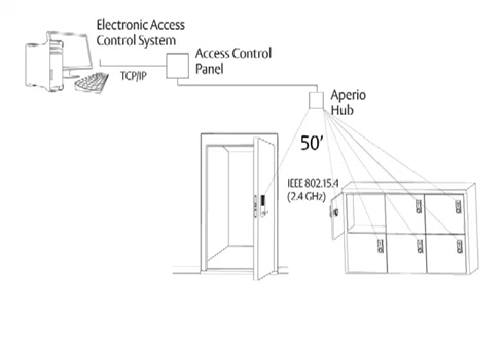For a stable and reliable radio link, make sure the cabinet, locker, or drawer on which you are installing the K100 is within 50 feet of an Aperio hub. For details on installing an Aperio hub, please refer to the Aperio hub installation instructions, which are available on our website, intelligentopenings.com.

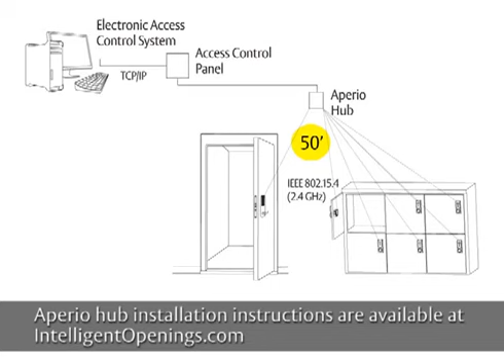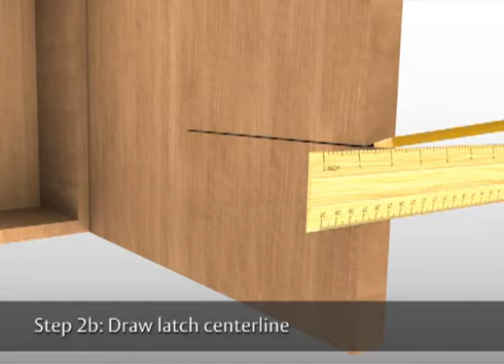Hold the lock body to the inside of the door and position it generally where you would like it to mount. Locate the lock centerline notch on the latch and use a pencil to mark this point on the inside of the cabinet door. Draw the horizontal latch centerline from this mark on the inside of the cabinet door. Next, transfer this centerline to the inside of the cabinet.

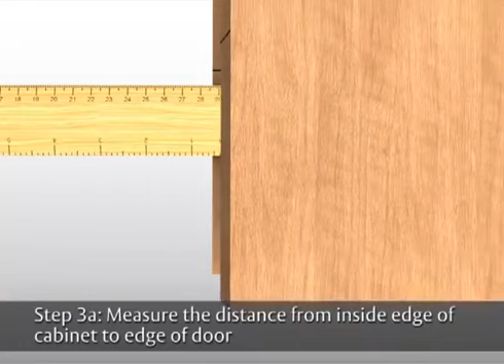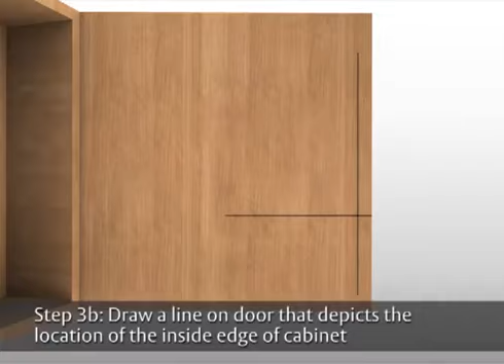Measure the horizontal distance between the inside edge of the cabinet and the door edge. Using the same distance away from the door edge, draw a line on the inside surface of the door. This line depicts the location of the strike mounting surface. Peel off the protective layer of the lock template and align both the latch center line and the line depicting the inside wall of the cabinet.

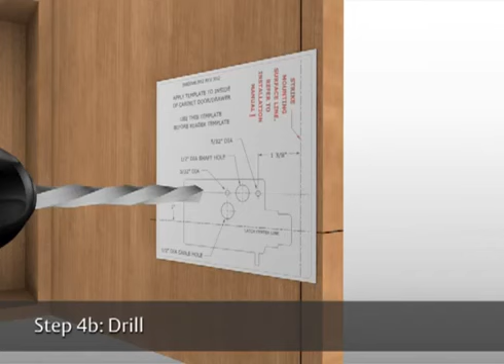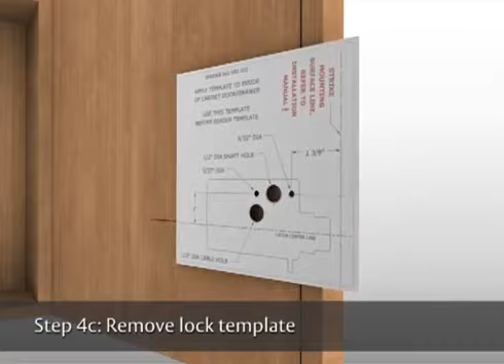Press to secure. Drill 4 holes through the cabinet as shown. 2 holes are 1/2 inch diameter and 2 are 5/32 inch diameter. Remove the lock template from the door. Peel off the protective layer of the reader template and align it to both holes drilled in the previous step.

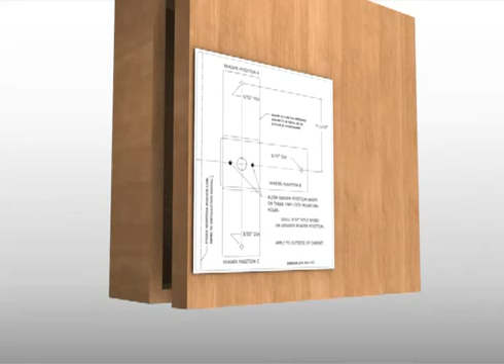Note that some reader orientations may prevent use of the key override function. For example, in the door handing shown here, manual override cannot be used in orientation A, but it can be used in orientations B and C. Drill only one 5/32 inch hole depending on the desired reader orientation. Remove the reader template from the door.

If your cabinet door thickness is greater than 1/2 inch, install the provided shaft extension to the reader to ensure proper engagement into the lock. Install the shaft extension to the shaft with the provided 2-56 by 1 1/4 inch screw and firmly tighten the screw.

Although a key override paddle is included with every K100 unit, the cam lock required to activate the key override can be purchased separately. If a key override is used, install the key override paddle on the arm of the lock body with the provided 0-80 by 1/2 inch screw and firmly tighten the screw.

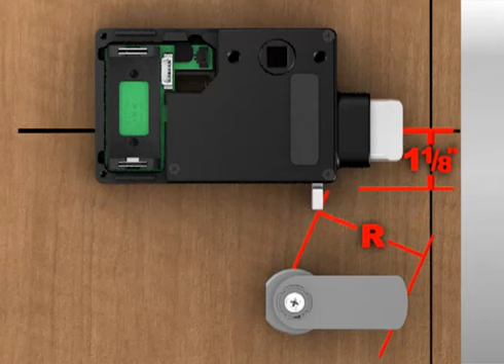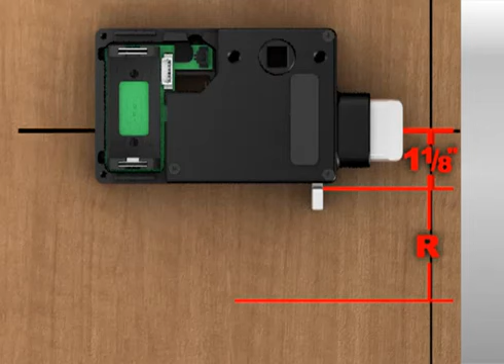If a key override is used, first measure the cam length, R. Calculate the distance from the lock features as shown in this animation. Add 1 1/8 inch to the cam length measurement R. The latch center line must be a total distance of 1 1/8 inch plus cam length R away from the center of the hole you will drill for the cam lock. Mark the center of the hole to be drilled for the cam lock. Drill a hole in the door based on the cam lock installation instructions.

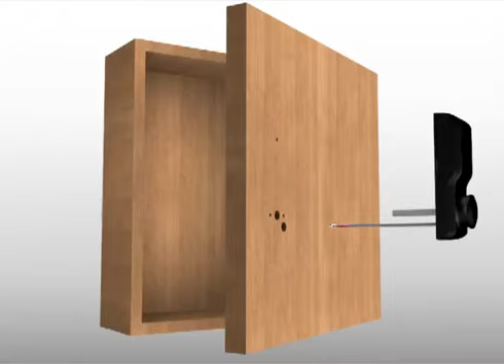Place and hold the reader to the outside of the cabinet, routing the wire through the 1/2 inch offset hole. Refer to the table on the screen to determine the length of the top mount screw needed, based on the thickness of the cabinet door. Install the washer and top screw, which attach the reader to the outside of the cabinet door. Make sure to avoid crimping the wires. Crimped wires may prevent the reader and the lock from functioning.

Remove the battery cover from the lock. Place the lock on the inside of the door, threading the cable through the lock. Using 2 6-32 lock mount screws, attach the lock to the reader. Tighten the screws. Electrically connect the reader wire to the lock body. Make sure to correctly orient the connector while inserting it. It only goes in one way. Gently tuck the wires into the battery cavity.

Always use new batteries. Install the battery and battery cover. Verify the battery is inserted in the correct polarity position. Install and tighten the number 2-56 screws. Please configure the lock before continuing. Refer to the Aperio Technology installation manual for details. If you have a double door, skip to step number 15.

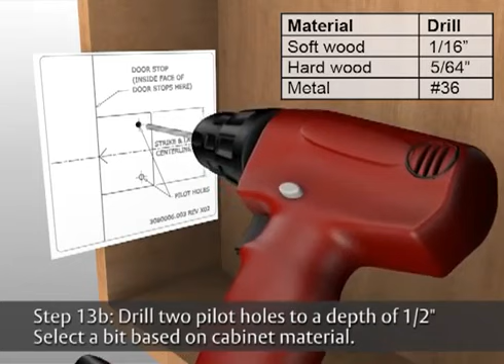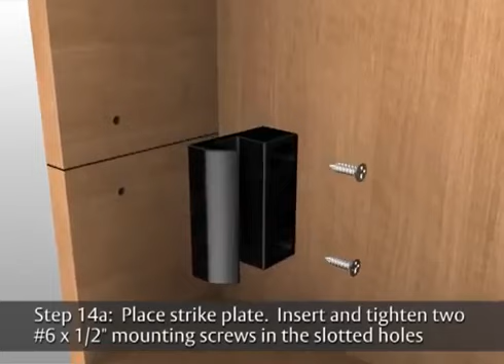Peel off the protective layer of the strike plate template and align it to both the latch centerline and the edge of the cabinet. Drill 2 pilot holes. Remove the template. Place the strike plate over the pilot holes. Insert and tighten 2 screws in the slotted holes.

Close the door to verify installation. Adjust the strike plate if necessary. After adjusting, insert and tighten the lockdown screw on the strike plate. Do not install the lockdown screw until the strike plate is correctly adjusted.

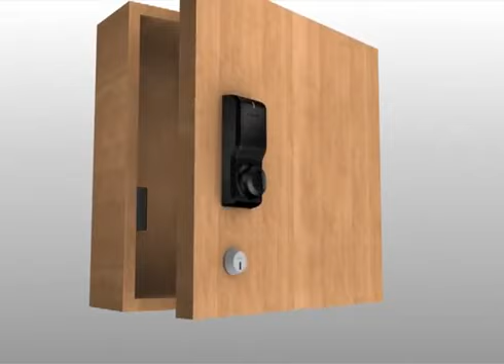If you are installing a Model 620 Double D bracket on a double door, place the bracket on the door, making sure it aligns with the mark made in Step 2C and the edge of the door. Mark the door. Remove the bracket and drill pilot holes at the 2 marks. Install the bracket using the mounting screws provided.

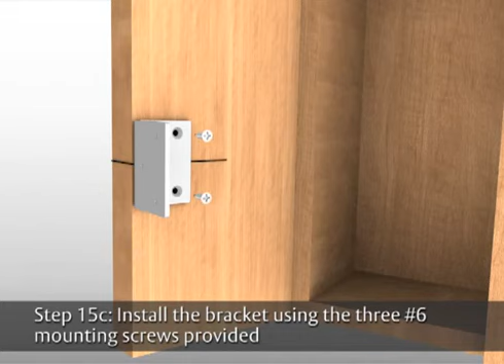Place the strike plate over the holes on the 620 Double D bracket. Insert and tighten the 2 provided 6-32 by 5/16 inch screws with the 620 Double D option. Close the door to verify installation. Insert and tighten the lockdown screw on the strike plate.